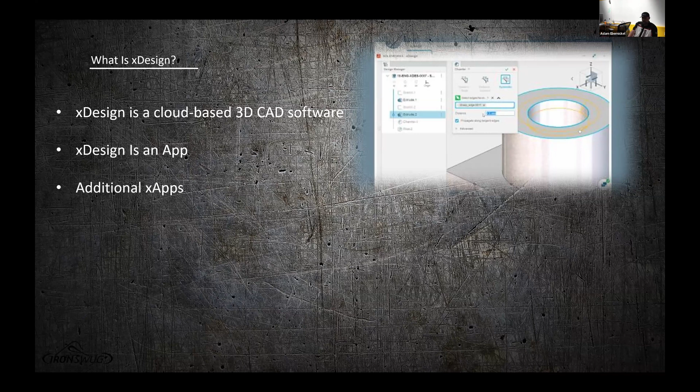Just thought I'd throw them out there so you know: X-Shape, which is subdivision modeling, X-Mold for mold tools and stuff, X-Frame for weldment and structures, then X-Sheet Metal for sheet metal parts and flat patterns and different things like that. So there's a lot of different X apps out there you can look at and utilize that are all web-based.

One thing a lot of new companies like about the platform is because everything is cloud-based, you don't have to worry about spending $2,000, $3,000, $4,000 on a PC or computer for somebody. You can get them just a basic notebook and run everything from that and let the cloud do all the heavy lifting, right? So it reduces some IT stuff there too, as well. Just a thought to think about.

But first, let's go ahead and talk about a few things that you guys are going to see. Hopefully everybody participates, if not that's fine too. But let's go ahead and talk about a few things that you're going to see in the app on your phone here in a minute.

On the right-hand side, when you start looking at it, you're going to see this little menu. This is important because when you're using a mobile device or touchscreen device, this is going to be shown. Now, if you're on a computer, you can actually go down and click it and tell it to come on, in case you have a touchscreen computer or something.

Let's start with the first one: your shortcut menu. Everybody knows what the S key is, hopefully? The S key is a very powerful tool. If you hit the S key while you're designing, it'll bring out a shortcut menu.

I always like to say reduce your mouse miles, right? Don't sit there and spend lots of time chasing for commands and features. Put them at your mouse. It's going to save so much time. You're not running miles and miles a day with your mouse. You're able to locate them right there where you're at and where you need them. And the S key does that for you.

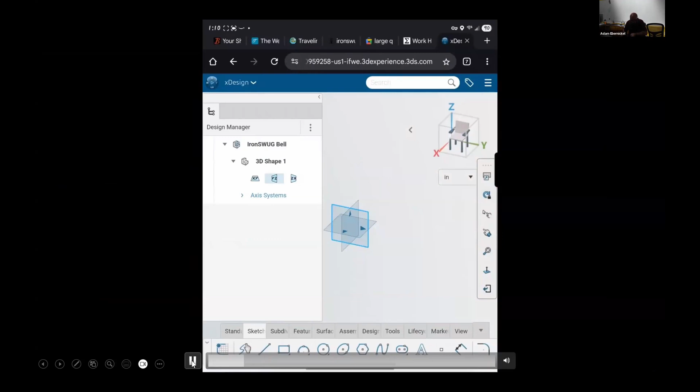Okay, so this is our interface. Back up, right here. All right, so this is our interface. Back up just a little bit more. Yeah, this is our interface.

So this right here, guys, on the right-hand side, these are those touch controls I was telling you about. You can find them down here in your menu at the bottom. Consider this kind of like your command manager for SolidWorks. It's where all your functionality is going to be. But this is those touch controls that pop up when you have them set on, or if it understands you're on a mobile device, it'll automatically pop those up for you.

The first thing we're going to do is throw in a sketch. We'll play that for just a second. We're going to click this plane right here, this primary first plane, the YZ plane. We're going to start drawing a sketch.

Now, there's a couple ways to do a sketch. What I like that's kind of cool is this little feature down here, and this is what I try first. If this doesn't work for you, you don't want to try that, that's fine, we can do it a different way. But this is kind of like a freehand draw.

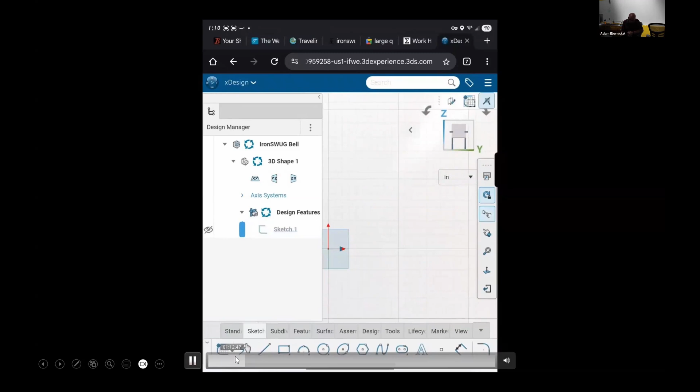So back up just one second, I want to re-show that freehand draw portion. So when I get ready, I click it, and you'll notice I click down here with my finger. I shift this over a little bit right before I do that. And I click it, watch how this freehand works. See how I just drew it up? Man, that's horrible, I'm surprised it even made that straight line. But when I freehand drew that, all I did was a straight line up, and I kind of arced it over a little bit, and it gave me a line with an arc.

And so that's the first one we want to make in our first sketch. The next one we're going to do is square this off. Now watch how I did it this time. I did it, it was not much worse than the other one. Look how bad that made that line. So sometimes it's good, sometimes it's not.

Pause for 1 second, please, Brad. They also have another application or app on the platform too, it's called the whiteboard. And the whiteboard's cool because you can just go in there and throw notes, similar to a whiteboard you see in Teams or whatever you're using. But what's cool about the whiteboard on the platform, when we did a presentation, was it 2 years ago at the Dassault Systèmes headquarters?

When we did that presentation, we did one on a whiteboard. Brad and I were doing a combined presentation, and I went in and drew this fairing. We were doing a motorcycle modeling mayhem thing. I sketched it out by hand, and when I made an oval for the speaker cutout, it was a horrible oval, but it still understood it as an oval and stuck it in there. So it's pretty cool to conceptualize things on that whiteboard.

But here I go and I click, and when I tap here, it automatically understands that needs to go there, I think. There's one place it doesn't. It clicks there. I kind of drag it up and pull it down so I can auto-align it. Notice it's pulling in and saying, hey, this is going to be a horizontal relationship here, very similar to what SolidWorks does with its assumed relationships. But I didn't quite assume that very well. Look at that line, it's a little off kilter. That's fine, I just go in and add that vertical relationship next.

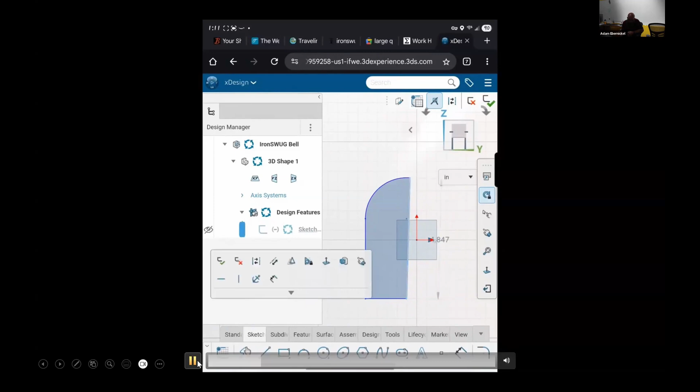Okay, let's see how everybody's doing. My connection was lost. But okay, looking.

And if that drawing thing I was talking about didn't pan out just right for you, that's fine. You could easily come in here and hit this line command. That's what I went back and did, a line command from here to here. Then if you do the arc command, just like in SolidWorks, when you take the end of the line back to the point and come back out, it'll automatically create that arc for you. That's a SolidWorks feature, still the same here. Then you draw it out and get your arc there, and we square this off.

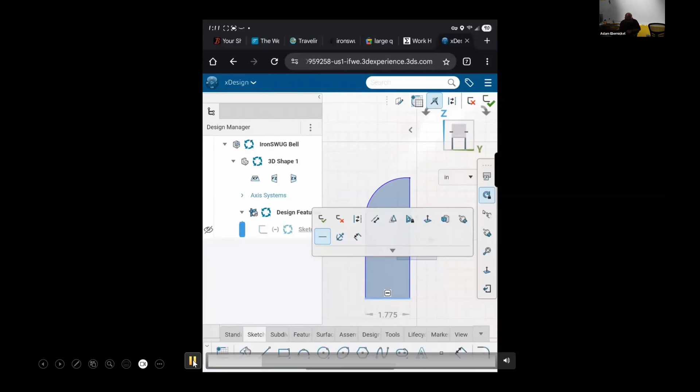Go ahead, notice I went back in here and added the horizontal relationship that was there, but I had to go back and add the vertical there too. I'm gonna check it, I'm doing... now hold on, pause right quick.

So here I have selected the multi-selection button, which is this button right here. What I want to do now is make sure that I am fully defined. I want my sketch to be fully defined, so I need to tie it to the origin somehow. My rule of thumb, and you'll see this in other presentations throughout the week, is that making your part or design symmetrical about the planes makes for a much better design practice overall, whether for mating, changing different features, all that stuff. So I'm doing a multi-select: I select this line, and I select the origin. When I select the origin, then I'm going to mate those.

Let's go ahead and play that. So there, click it, well that's coming in a second. I dimension that - that's going to be 1.25 on that primary line that we first drew.

You can pause real quick - you can do one of two things. You can go down here in your command manager or where your features are, and forgive me for not knowing all the names in XDesign just yet since it's fairly new, but this is going to be 1.25. You can click the line, very similar to what's been done in SolidWorks 24, where you just click that line and the dimension pops up for you, and you click the dimension. So it's dimension preview - thank you, Brad. That's the same in XDesign, they're doing it there. There's also a little dimension function in your tools as well that you can use. So that's going to be 1.25 here, and we're going to do a radius of 1.

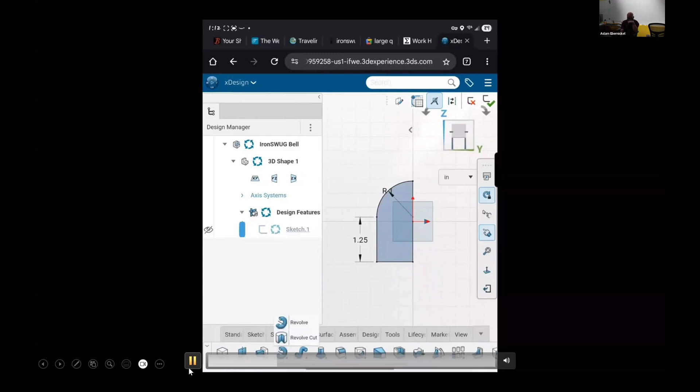So I select revolve, and now pause for one second. This is the only thing that can be a little cumbersome, and I'm noticing that especially with your guys' phones. I'm not going to lie, I may have cheated just a little bit - my phone unfolds and gets a little bit bigger. So I've got a little more real estate on my phone than you guys probably do. Either way, I cheated a little.

This box will pop up, and it can get a little cumbersome in your way. You can move that box out of the way, and if you drag it all the way over here, you can actually dock it as well.

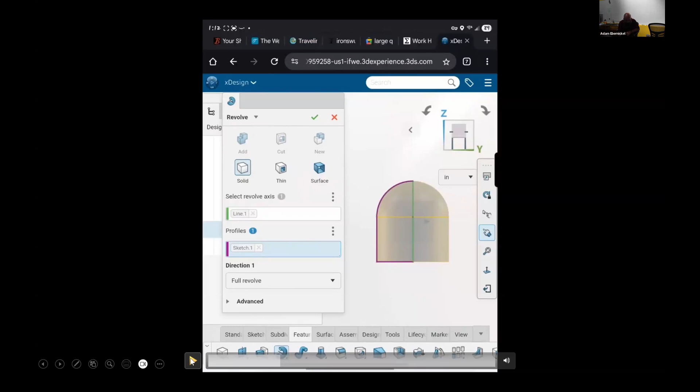Okay? Yeah. All right, so we picked that, we rotated it around. Did the revolve.

All right, so the next thing we're gonna do is we're gonna shell it. So in order to shell it, now go ahead and pause that real quick. This is not playing nice today, is it? Nope, it is not. So while he's getting us back to that point in the slide, I'm going to shell.

Now you can do a revolve and do a thin wall, which kind of works to where we're getting ready to go. The only problem with the thin wall, unless anybody knows different, you can't remove the face. So it's basically going to leave just a hollow entity at this point, versus what we're doing, we want to remove the bottom face. So back when we did that revolve, we did it at

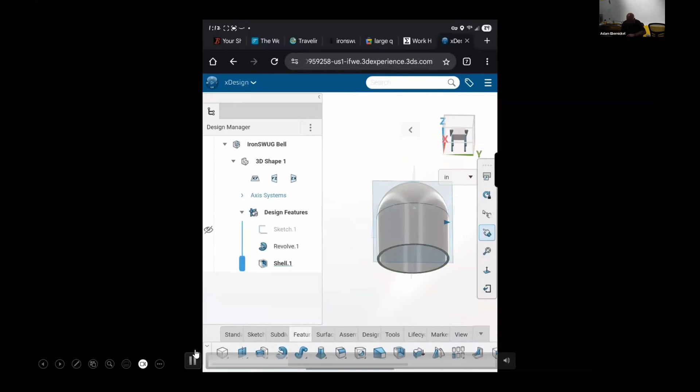0.0625, so we did a 16th inch thick wall when we did the shell, and we removed the bottom. Once we remove the bottom, we're going to go ahead and click it. Now there's a button up here - when you click this button, you can hit ISO and get to that. We click the front face, and now what we're going to do is just add a couple of sketches, and this is to try and get us to the next point in the features.

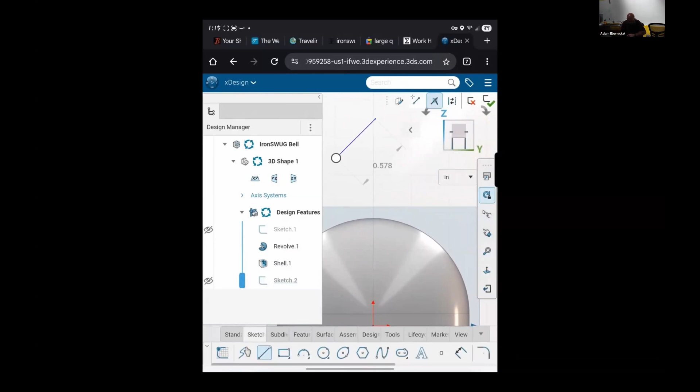We're going to add a segmented line, and there's a reason for that here in a minute. It's basically to help us. I mean, we could have added a point on the line too, but doing a segmented line, we can actually use it to help locate this line on the arc of the model.

The top part of that segment is going to be 3/4, the bottom part of that segment is going to be 1/4 of an inch. Now notice this is where I didn't connect - I thought I connected them and I didn't. So what I do is I just drug it down out of the way, did a multi-select, selected the 2 points, and then connected those.

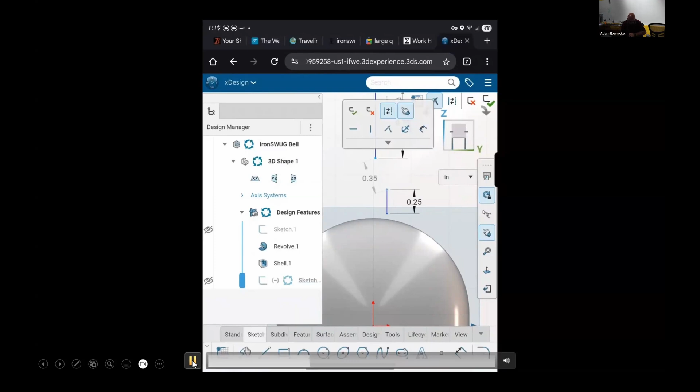You can go for just a little bit. All right, go ahead and pause just for a minute, give everybody just a minute. Anybody have any other questions up to this point?

I don't know how to find it. Got something pulled up here, huh? Go back.

I don't know what that is. Is that from the browser or your phone? No, from the browser. Is that an X button at the top? What is that button? I can't see it, the trash. Trying to zoom in, zoom out. Go back maybe, done, try back. Stop, it's not doing anything, is it? It was there in the background.

Drag and drop your content anywhere. Oh, I think you went into notifications. So you're there, okay, let's close that. We can try and restore it. Nothing, and if you didn't save it, it's not going to come up. Did you save this part of it though? Not this advanced part, but just the section, yes. I can start it again, okay.

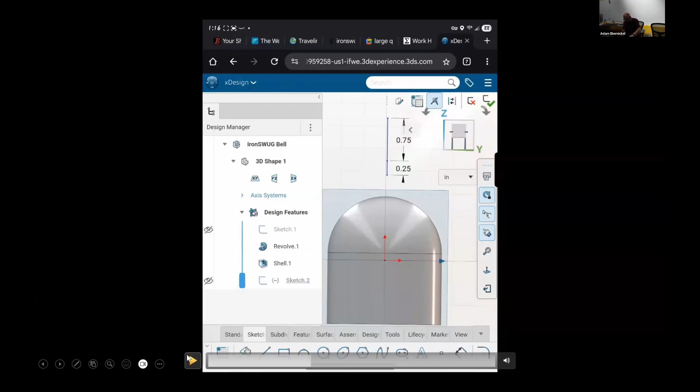All right, let's go ahead and play. So now we're going to take this line and slide it down into the model just a little bit. We're going to pick some points. I want to take that line and make sure it's aligned with that plane in the middle. So I align that, and then take the next point from the segment and attach it to the arc. That way I have that 1/4 inch sticking through, and the 3/4 sticking up. Okay, pause, it's fine.

All right, so the next thing we're going to do is add a plane. Go ahead and pause. What I've done is add that plane from down at the bottom - in your features, you gotta go to your features to get to it. Then add your plane here. When you hit add, just grab your main horizontal plane because we want it parallel to that. And this one's going to be kind of important.

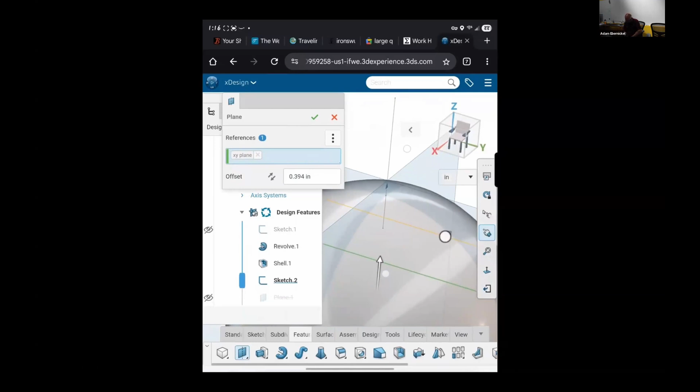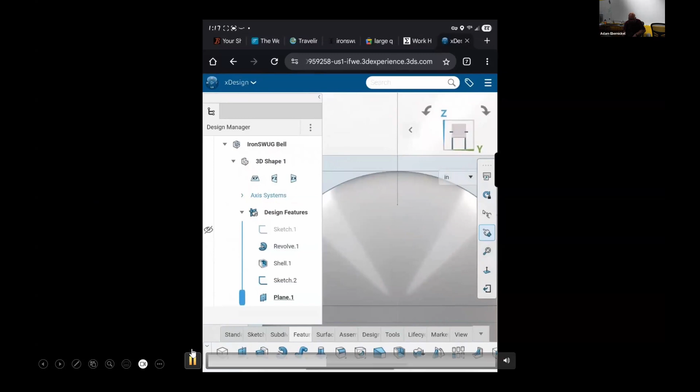We want to use the cursor button this time. Going back to what we were talking about a minute ago, when you're using your fingers, if you're like me with big fat fingers, you'll be clicking everything but what you want. But using that cursor, we can fine tune and pick this point right there. Using that cursor feature is what's going to help us. See, that's me not using the cursor feature - I picked the whole dome of the thing, and I was like, okay, let's try that again. Let's do the cursor. Once I did that, got the cursor in there and select it, now you see my plane sitting right at the top of that dome.

All right, next thing we're going to do is throw some sketches in there for those planes. Here's where I'm saving - come back here, hit that save button. That way it saves all your stuff, so you don't lose it if you get backed out or something.

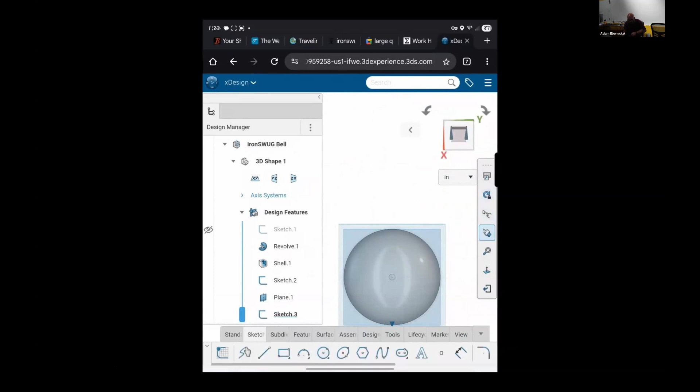We're going to select that plane and draw a circle on that plane. Just do a center circle or however you want to do it. Click it. That circle is going to be, I think, 1/4 inch - no, sorry, 1/8 inch, we're going to do an 1/8 inch on that circle. Again, here we're just creating some different sketches for some sweeps later on.

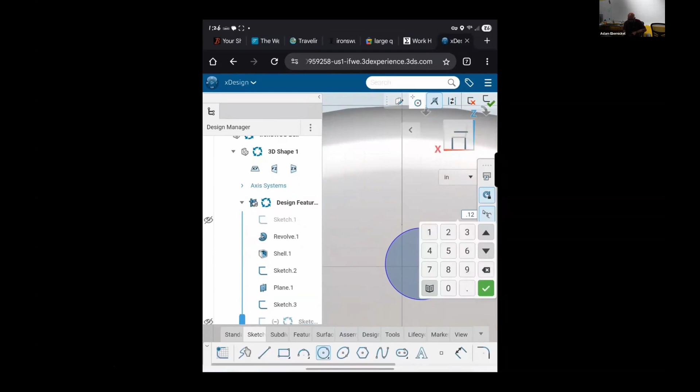All right, select that right plane. We're going to throw another circle on it. When we're coming in here, we're going to select it and put it right here on this. You can see, I think this is the one I missed too, using my fat finger or whatever - it kind of came off, that's fine. We're going to make the diameter of that one 1/8 inch as well.

Now here's where you have to go in and make sure that you don't do what we were just talking about, right? That extra circle came from me not turning that function off. So if you don't trigger or toggle the function on and off, you'll end up putting a bunch of different circles or lines or whatever on.

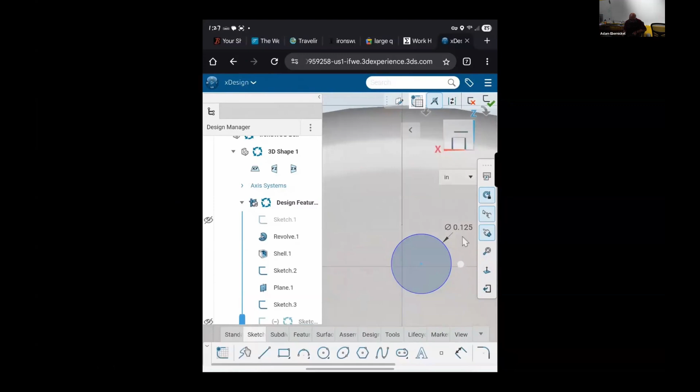Then we're going to multi-select the point here, use that cursor to select that point, and then we'll connect those so we get it online.

That was another 1/8 inch circle. Again, that little box, you click that and it comes out, that puts you isometric.

We've got one more circle to do. That's going to be on the front plane. And this one's going to be a little bit bigger.

Go 1/2 inch on that circle. It's going to slide over kind of in that same general area on another point again. There's that line. I use this line as a reference, right? And so I put it in here and go to the top of the quadrant.

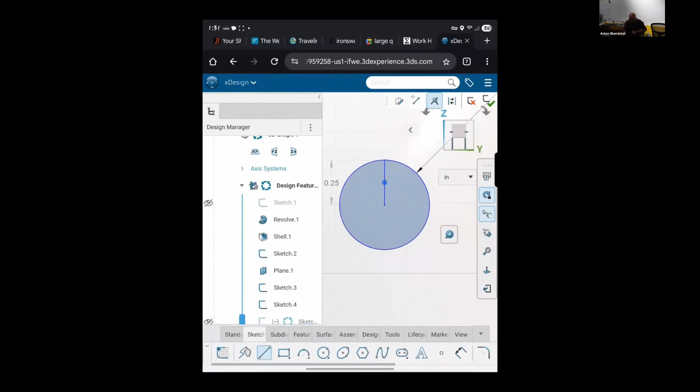I come over, I have to deselect everything again, right? There, me not deselecting and putting another line in there. Once I deselect, I can select it, change it to a construction line. Still have the same flyout menu functionality like we have in SolidWorks.

Now I can select that, do my multi-point select here in just a second because I'm not doing it here. I didn't do a multi-point select, so it didn't take. So, oh, duh, got to go hit multi-point select, right? Even myself. Got it. Click that point, and that point's going to go over there and connect to the last point on that 2-segment line we created.

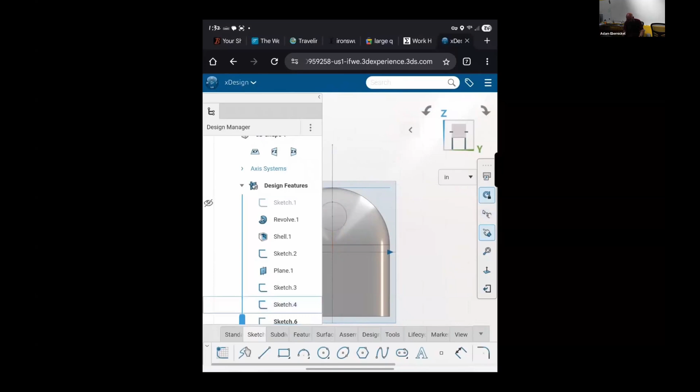So at the bottom of that 2-segment line, we connect the top of the circle to it. Okay?

So there, we got 3 circles we basically did a sketch on, one on the top on that plane we created, one on the right plane, that's an 1/8 inch, and then one on the front plane that is a 1/2 inch. And now we're going to go in and do some sweeps.

Just going to kind of sweep through this stuff and create them. We're going to start with this main line here and click it. So we're going to say that's our path. And the circle down below is going to be our profile, not the dome.

Again, my fat finger, click the dome. Telling you, the cursor is the way to go for me. Of course, that sweeps it.

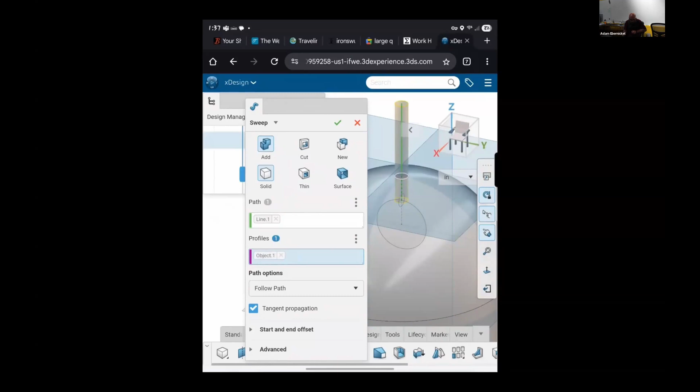That gives us our line there. We're going to do the same for the other ones as well. Make sure we have them combining when we do it, or merging.

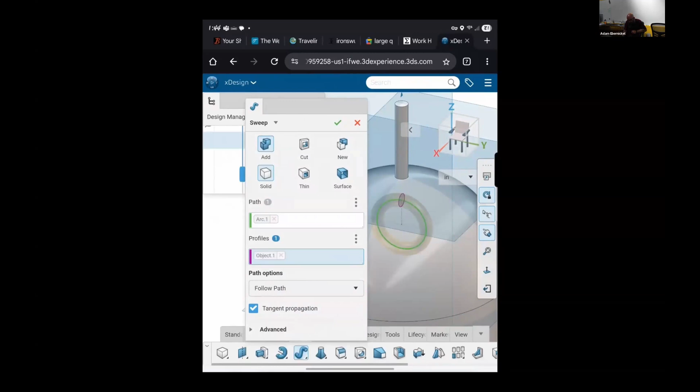All right. There we go. And I'm going to create another one. I think I've got them all now. That's it. So we've got the 3 sweeps.

You're going to pause right there for a minute, Brad. We got the sweep that we did here with that profile and path. Then we have the interior. Play a little bit more. It might turn upside down. So yeah, right there. Pause.

And then so you see how that came down, and then this one was created here. So that's from those 2 circles and paths that we made. Okay. And the reason we have to rotate this up is because we're going to start doing some stuff on the inside here.

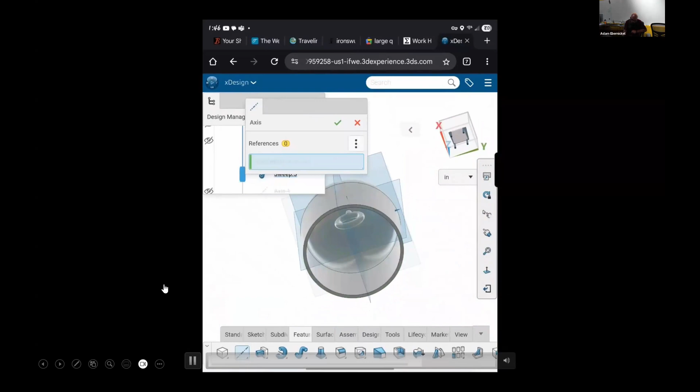We're going to do an axis. And we're going to pick the interior donut per se, right? Because we want the center of that donut for the axis, or axes. And that's because what we're going to do next,

I'm trying not to reveal exactly what this is. Some people might know, even when we tell you, you may not know. So I'm going to pick that plane.

And what I'm doing here, pause for just a second, Brad. All right, so what I'm doing here is I pick this plane. After I've got the axes, of course, I put the axes in on the donut. I'm going to pick this plane, then I'm going to pick the axes.

And the reason I'm doing that is because I'm saying I want this kind of plane, and maybe parallel, right? But I want to take this plane and I want to move it up and have another one just like it on this axis that I created. But I want it to be 20 degrees. So I'm setting that plane at 20 degrees.

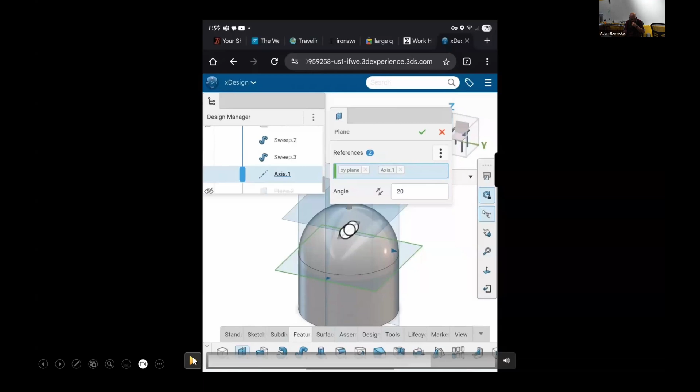Next thing I'm going to do is go in and offset that plane just a little bit, because that put it at the center of my axes. And this is all going to make sense here in just a minute. But that put it at the center of my axes.

I really want it to drop down from the center of the axes a little bit, and I probably could have just done an offset with that. But I just created a new plane. And I dropped it down, I think, yeah, 3/16 of an inch, 0.1875.

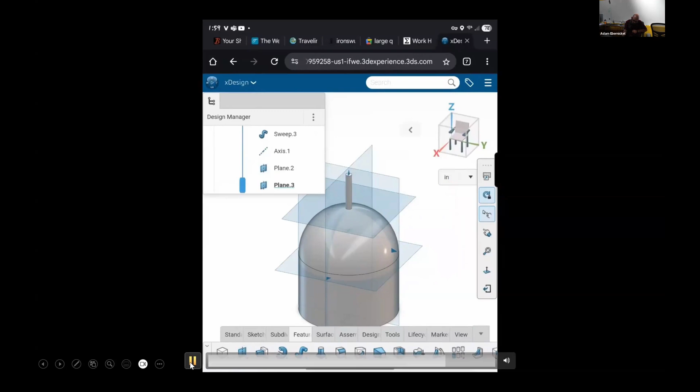And once we drop that down, you can toggle it back and forth. Notice I'm toggling back and forth just to see, because it's such a small dimension, just making sure it's going the right direction for me. And once I toggle that down, we're good.

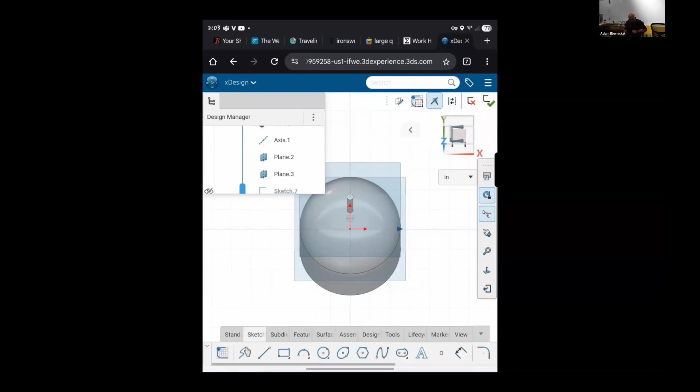I'm going to go to that plane next, because I'm going to put a sketch relationship on there. The next feature I want to create is a circular pattern, and I need something to revolve that around. So I'm going to use another sketch line on that plane, the last plane we created. In the bottom of your feature tree, pick that plane and do a sketch, and we're going to draw a line kind of diagonally across that little plane.

Now this one, I know somebody's going to fuss at me, because I did not fully define this line. Boo. I know Toby Schnaars is going to be out there hating on me, saying fully defined every time. If you haven't heard that song, go listen to it, it's a good earworm - fully defined every time. But I just went ahead and got out of it. I could have defined it real quick, but it's really arbitrary. It doesn't matter too much as long as you have it going diagonally across that plane.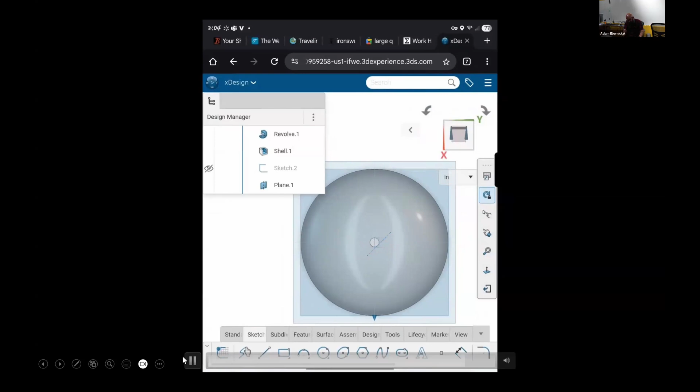Now we're looking for our features, and the features we want in the pattern are going to be the loop, basically those sweeps we created - that's what we want to do the circular pattern on. We'll pick that sketch, the last sketch we created on that new plane. We only want 2 of them. Let's go ahead and pick that, change the angle and the number of instances to 180 degrees and 2 instances.

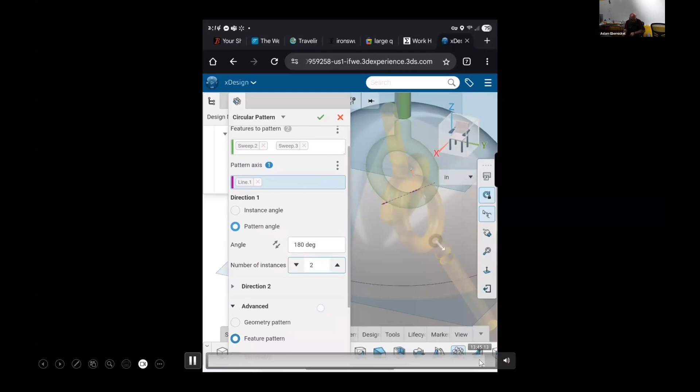You gotta kick it and wake it up because it's still showing 3. Scrolling down - actually, can you back that up just one second? Okay, so watch when I scroll down here, because you've got to make sure you have this stuff selected right or it won't work.

Not geometry pattern - it actually has to be a feature pattern, not a geometry pattern. Anybody know the difference between feature and geometry patterns? You want to pause that real quick, Brad? Okay.

Feature and geometry patterns - anybody use patterns in SolidWorks? Yeah, for me, occasional things like that. Okay, yeah, or I'll use the geometry pattern when the feature pattern doesn't work. Yeah, or vice versa, right? And this one, the geometry pattern doesn't work, right? So I use the feature pattern. Great reason, right? It doesn't work, we'll just use the other one.

I like that idea. Okay, so let's start with feature patterns. The feature pattern basically says, okay, I've got all this data that created that feature, and now I want to apply that to all these other pieces that I just patterned out there. So it's having to calculate for every one of those instances - it needs this level of detail for each one of these. The geometry pattern says, oh, you did this over here, do you really need that same data across the board, or can I just give you a pretty picture that's going to be right? That's basically what the geometry pattern is - it's just giving you a graphical representation rather than all the full-blown dimensions.

Now, the difference is, if you're using SolidWorks - and XDesign is probably the same way - if you're doing something that has a gazillion patterns, maybe some kind of mesh where you've got to do a lot of cutouts, and you're patterning that stuff out, use geometry pattern all day. If you use a feature pattern, it's going to take probably - we've seen 10x before, Brad, when we've tested it. Or honestly, it usually just crashes - it just freezes for a while.

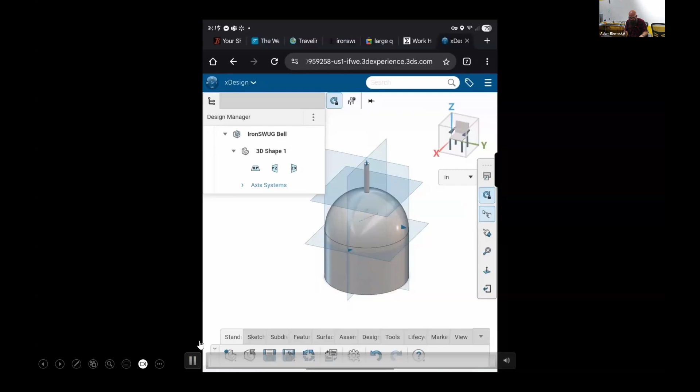Saving the component. But if it's not a purely symmetrical component and you're creating an array, sometimes it doesn't work.

I feel like I've had times where the geometry pattern doesn't work. Yeah, there are some instances where SolidWorks is basically telling you, hey, I've got to have that data to recreate this. It's like projecting onto a different body or surface. Exactly. By all means, if I can select geometry pattern and it works, that's where I'm going to go on my patterns. But yeah, you're right, there are instances where SolidWorks is like, I can't just do it on geometry alone, I'm going to have to have all that data too.

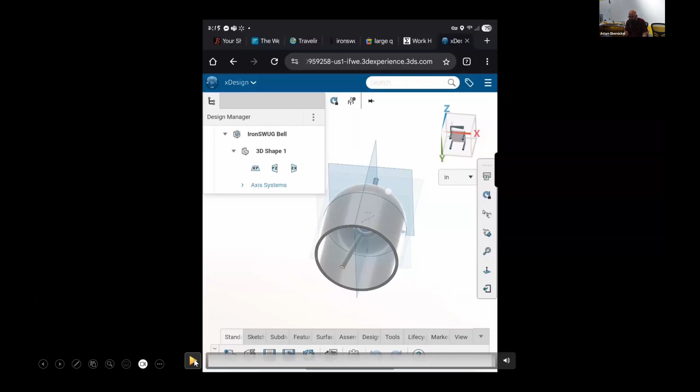All right, so I think we have reached the end, just kind of shifting it around, giving you a final look at it. I know that's a lot to take in. It was more about getting your hands in there and using that software and just seeing what it looks like. It can be a little cumbersome on your mobile phone. I just kind of wanted to see how it would work. I know it was a lot.

It was drinking from a fire hose, right? I know, I know it was. But it gave you a little insight, just a little fun game to kind of kick the week off. Let me jump back in here and I'll finish out the presentation and we can turn this over to Mr. Hank Meador. Yep.

All right, so I always like to wrap my presentations up with two things: a little note card of if I was you, what would I write down for my notes, and then my call to action that I usually like to put out there too. So for the first note, I'm going to say design anytime, anywhere. That's what I would write down, that I could design anytime, anywhere.

There's lots of hardware out there that's needed to use traditional methods. With this, there's not, so it works very well. It's got cloud-based, cloud-powered flexibility, kind of fun to use with the touch. Gives you a new tool to play around with and learn and not let defeat you, right? Because it is easy to use, but it does take a little practice. And design while lounging, to be lounging somewhere and design.

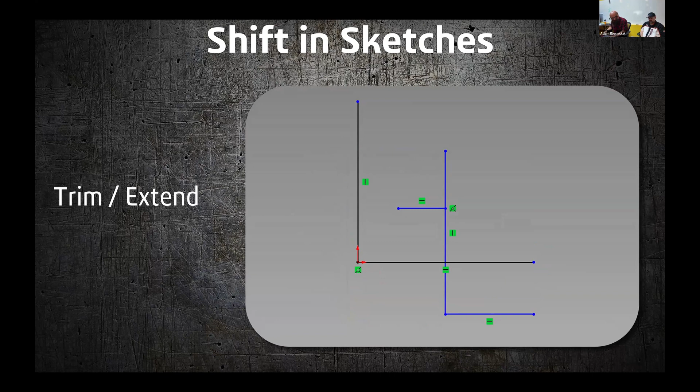So we'll jump over to SOLIDWORKS here to show you, because everybody is always tired of PowerPoint. We'll go into a sketch here, we'll start a new part. Go into a sketch, and we're going to show you everything the Shift button can do just in the trim command.

Draw some sketches, draw some lines in here. Some other tips and tricks while you're in here: the Enter command will also repeat your last command. Notice how I'm drawing a line and it's keeping everything connected here. What if I don't want that? Well, if I click and hold the left mouse button, it'll let you go, and it'll keep you from having to keep that chain together.

Just a little extra tips and tricks in here. I want to go find my trim command, hit the S key. I have mine customizable. We have the typical trim command. We can come back, power trim. We can pick trim the closest, that kind of thing. But we're going to cut some things off here. What if I want to extend this one out just a tad? Well, I don't want to exit my trim command. Hold the Shift key, grab the end of your line, and pull straight up. It allows you to extend where you want without having to exit the command and go back in and modify your sketch.

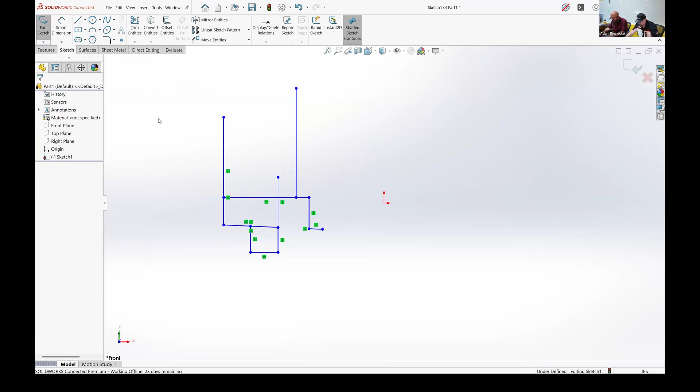Okay, we'll go back into SolidWorks. Delete all these here, use our mouse gestures here. While we're in here, how many people use mouse gestures? Okay, sometimes I'm going to encourage you to try, use it a little bit more. Start simple, because you can do 2, 4, I think 2, 3, 4, 6, 2, 3, 4, 8, and 12. Start simple, do 2 and go from there and add more to it. We'll throw some dimensions in here.

Hold the shift key over top of the center line. Go to your dimension. It automatically assumes you're going to do something in revolve mode, and it's going to tell the dimension that this is going across the center line. So now you're modeling with your design intent to say, I'm going to revolve around this thing.

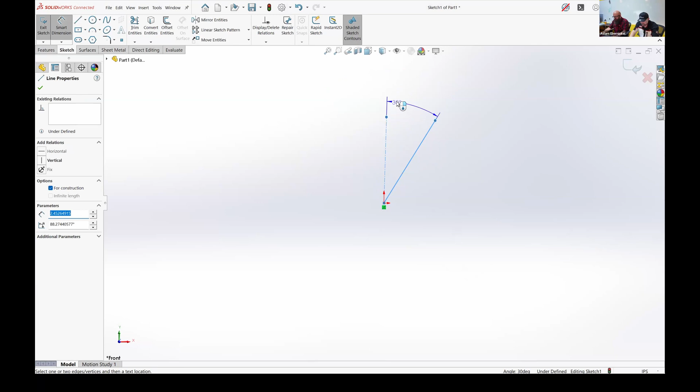I can keep going, but if I don't, we'll just cancel that out. We'll do it again to show how quick that was. Go to our dimension, select our dimension here. We know I've already set it at 60, so we can set it at 30, or if I hit the shift button, it's going to tell it I want a full width dimension, not just a half across the center line. So we're just trying to add and play around, learn things as we go.

Another big one we use a lot is dimensioning some slots, arcs, that kind of thing. We're going to create a slot feature here, or just a sketch.

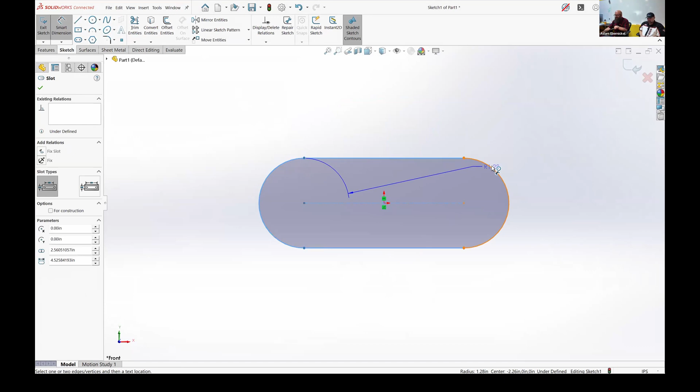Throw a dimension in. What happens when I click the other one? It's going to automatically assume I want center to center, correct? Well, maybe that's not my design intent. Maybe my design intent is I want it edge to edge. To do that, normally it's center to center. Find the dimension you want, go to your leaders here, click the max to max, get the same dimension end to end, correct? You can do it faster.

We'll delete that back out. My timer's going. There we go. Hold the shift key, click your outside radius, hold the shift key again, click your outside radius. Instead of going in and finding 4, 5, 6 clicks to get what you need, you hold your shift key, click the 2 dimensions. Now you've got your intended design, your design intent on this slot. So I know now my machine's going to cut this thing at 709, or well, I don't like that, so we're going to come in here and say 7.

I fell in love with that shift feature when I learned it. Yes, it's mind-blowing. Just holding one key down can change the way a certain command will behave. Things you didn't assume, and you're used to click, click, click, click, click, and spending all this time moving your mouse around. One button can help you out.

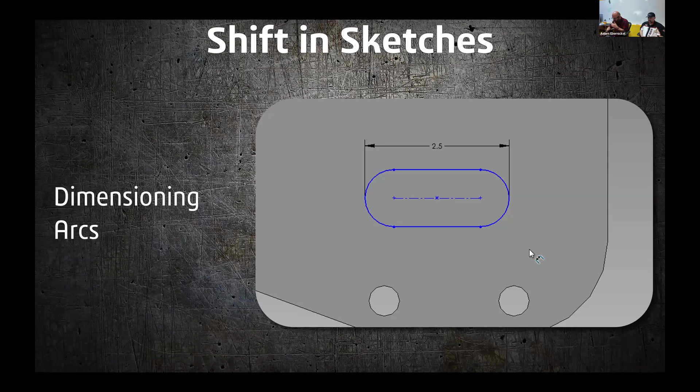So now that we've got our sketches created, we're going to go to our parts here, and we're going to the feature tree. Now, I'm sure everybody knows that if you click a top item and a bottom item and hold shift inside of Windows, it'll select everything in between those. That functions the same pretty well in SolidWorks.

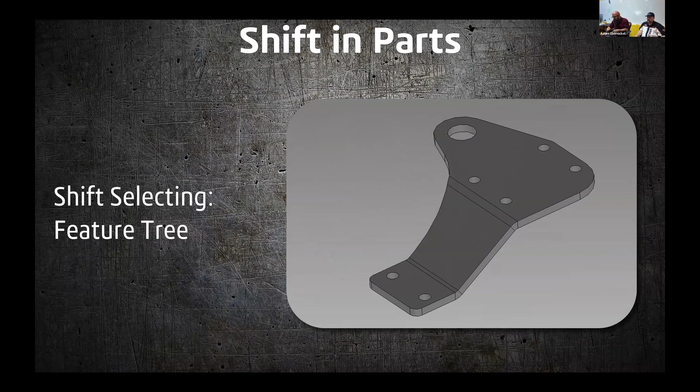But it also does things with your arrows. So I'm rotating things around, trying to show something to a customer. I don't want to touch the mouse because it's a little too jerky or too sensitive, or he's got some things he wants to look at specifically. Well, hold the shift key left or right, and it's going to rotate 90 degrees rather than the predetermined spin box increment set in your company default. Currently, I think mine is set at 15 degrees, but I don't want that. Hold the shift key, I can rotate it around 90 either way.

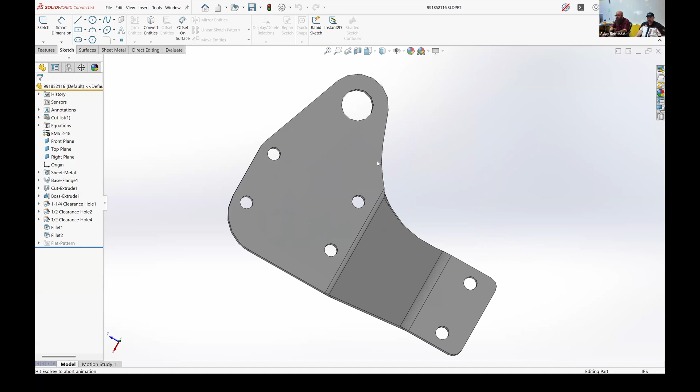The shift and the arrow keys. So whatever arrow key you press, it'll go 90 degrees that direction. That's one of the things that when we started navigating around parts, this looks good and all, but I'm trying to find an exact angle I want. I can play around with it, add what I need, create some views. If you're looking at creating specific views, you can do that as well, use it as a view command. It's a good question.

All right, so, zoom in and out. Z, zoom out. Shift Z, zoom in.

I'm not a big fan of using keyboard for commands. As far as moving parts around, I use my space mouse, which I didn't have plugged in, or it's dead. There it goes, to do the command. But if I don't have one and I want to navigate parts around inside my feature tree without using the mouse, or if I'm working on some things: Z zoom out, Shift Z zoom in.

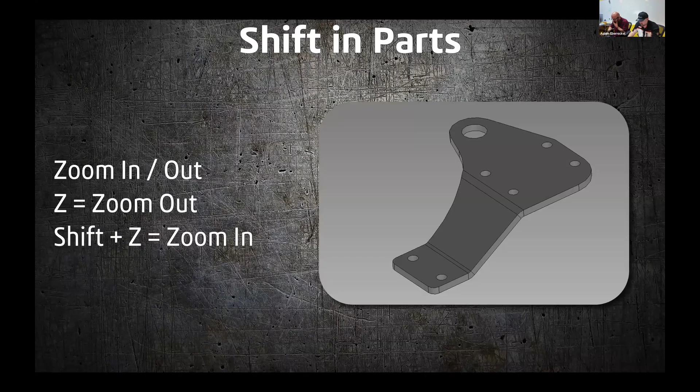Also, same thing, zoom in and out on your mouse wheel. Shift, zoom in and out, it's faster. So if you're working on little bitty parts and you want to get into a really tight nook and cranny, hit the shift key. The zoom increments increase. I think it's called quick zoom or fast zoom. Or if you're working on things that are really large and you want to zoom into a part to work on, instead of sitting here and spinning the wheel hundreds of times, use the shift.

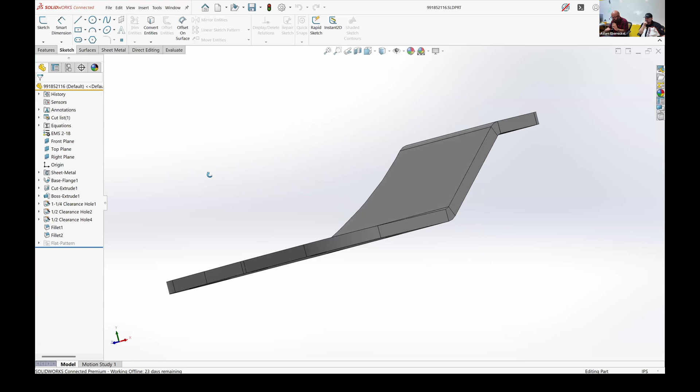Also, middle mouse button, or actually push and hold the wheel on your mouse, depending on if you've got a 3-button mouse like this one here, the 3Dconnexion one's got a center button on it. Hold it down, it's your pan rotate. Or hold Shift and move up and down, that does zoom in and out as well. So if you're trying different commands, trying different things, finding ways to make your workflow a little better, Shift and middle mouse button up and down will help you zoom in and out.

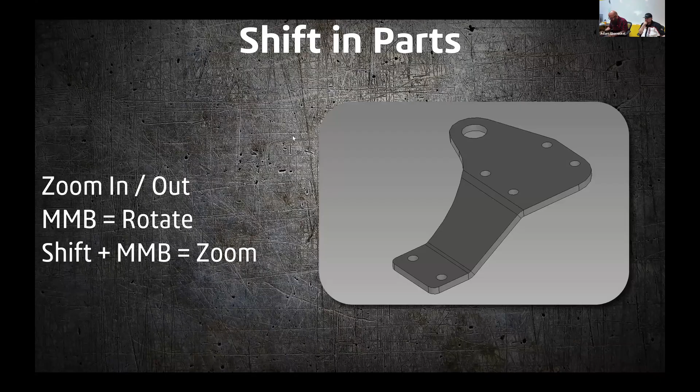My apologies, I went backwards. But PowerPoint ain't doing too good today. I know, PowerPoint ain't doing too well.

So let's see if I have that part. If not, we can make one real quick. We'll throw a pattern in here and create one real fast. Shift also will help you ignore instances or add instances to pattern components, linear patterns, things like that. We're going to create a part here real fast, throw a sketch in there, or throw a pattern in, and we'll go from there.

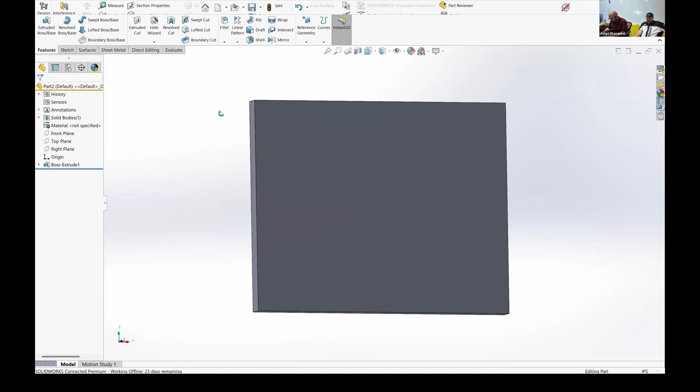Yeah, I fully defined mine, Adam, so I don't want Kirby getting... I don't want Toby getting mad at me here. Throw some dimensions in just because I don't want to be that guy. Show bad habits.

You were talking about having a mesh pattern over and over again. This will be some actual tip that you could use. You would like.

See that? Let's hide that. Poke the eyeball, blind it, hide all the problems you don't want to see. Unpoke the eyeball and see all your sketches.

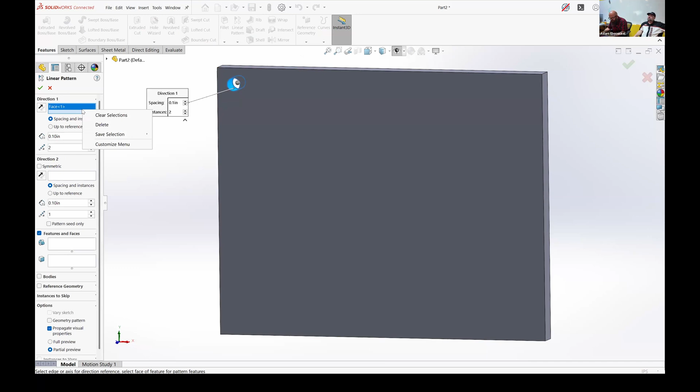All right, so inside of our linear pattern here, we're going to select our directions we want to go. Feature to pattern.

Let's add some numbers in here. Oh, got my pattern in here. Well, I don't think I'm going to actually pass something through here. I want to make sure I can edit your feature.

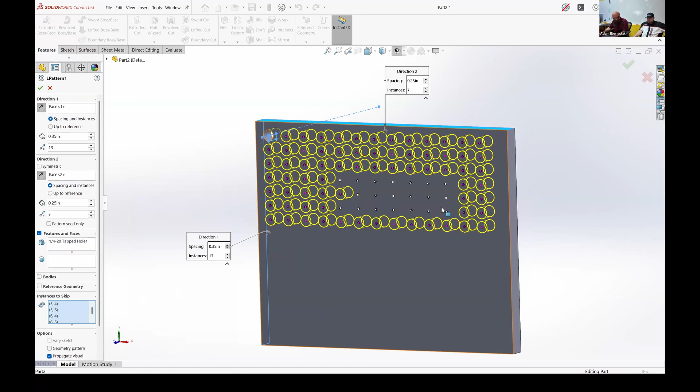I can do instances to skip, click the things I want, or I can come in here and select the things I don't want, and then hold shift, and it'll ignore the things that I don't want already selected, and only pick the things that I want. But if I backwards select over it without holding the shift key, it'll bring it back. It'll toggle it on and off. You hold shift, it'll only tell it to make it go away.

Didn't know that, that's a good one. Yeah, I didn't know that either.

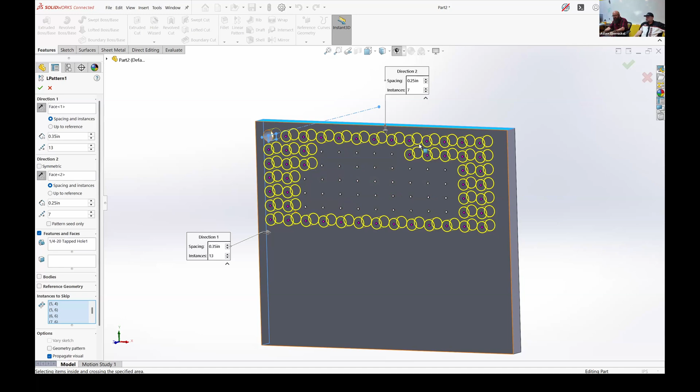So now I've kind of got the space I want. I've still got my pattern there. I've ignored the things that I don't want. We can use that as just another little button, so you're not having to sit there and click and hide everything one at a time.

Too legit to quit, right? Keep going. It's not like we're making a macro. No, this is all built into the software. It's good.

So, got our sketches, got our parts. Now let's go to our assembly.

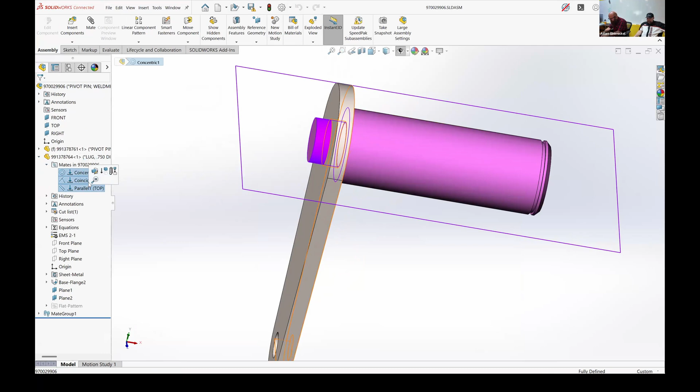All right, let's unmute. Let's unmate this thing. All right.

You can also do transparent faces on things. Let's see if it'll do it for me inside the mates if I have this set up correctly. I believe it is correct. Let's just save this here and bring it into the newest version.

Before I get too far, how many people are using SOLIDWORKS 2025, the current one? Oh wow, nice, 24? Oh awesome. Anybody using Connected, SOLIDWORKS Connected? Okay.

All right. Well, I'm in here, I'm going to create some mates. I click the face that I want, it makes it transparent, so I can see how my mates are going to go.

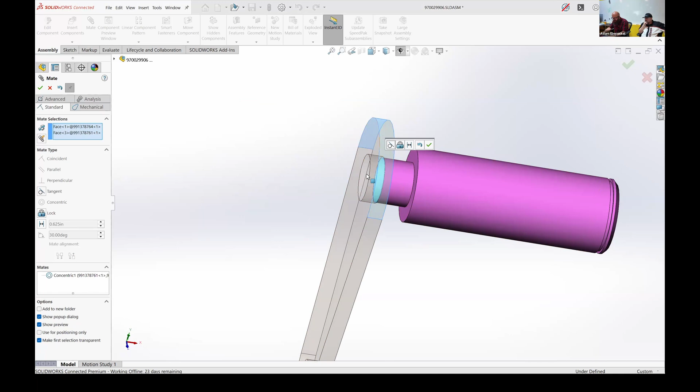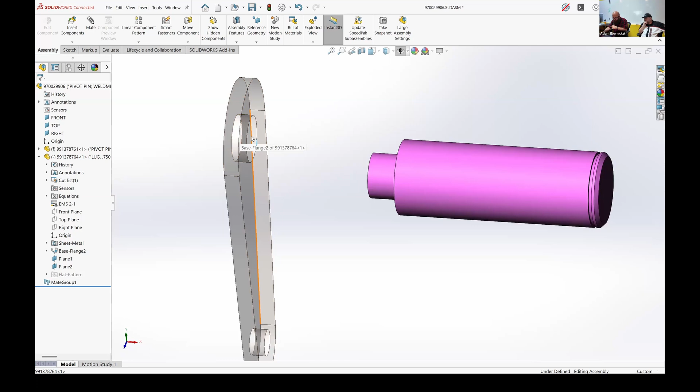The shift button will allow us to pick the areas inside. Actually, back up, Control Z. We're going to make this part transparent first because I'm a dum-dum and forgot that, just so I can work and see where I'm going. But I don't necessarily want these faces in here. But notice it's allowing me to do it. I click shift, and it's going to allow me to actually select the face I want, even on a transparent part.

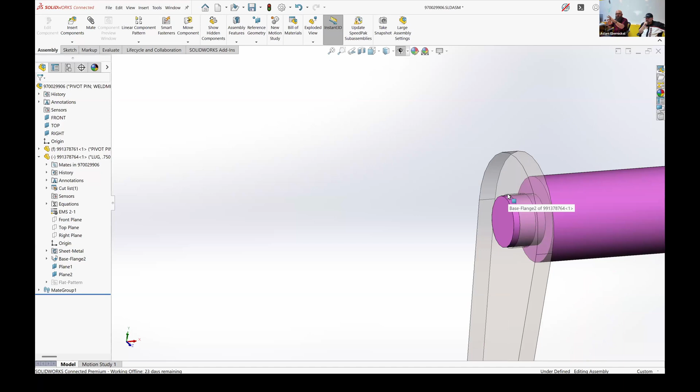If you have something in the way while working in transparent areas, hold Shift and click to actually pick those faces around inside those areas. Normally SOLIDWORKS assumes you don't want to select inside transparent faces and ignores them, but with the Shift key it lets you grab those transparent ones. Just a quick tidbit if you're working on something big and complicated and want to look into it while still using those faces as selectable features.

Does everybody know if you hold the Tab key, you can hide something, and hold Shift Tab to bring it back? When you hover over something with Tab held, it'll hide it. Then hold Shift Tab and hover over where it belongs, and you'll find it again. Shift Tab will bring those hidden things back.

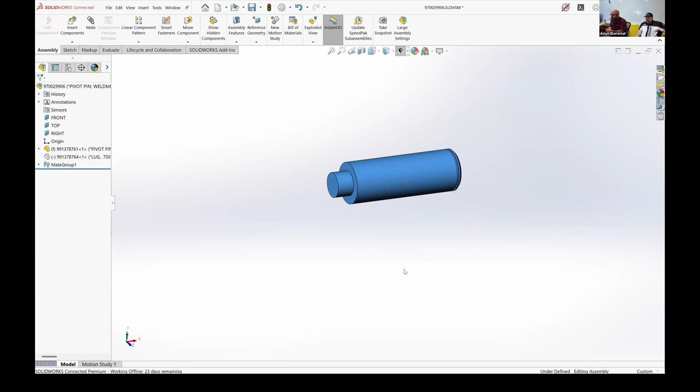Another tip: if you hit Control Shift Tab, using all three fingers, it'll temporarily highlight what's hidden so you can select the specific thing you want to show back.

So if you're working on big assemblies and you've hidden a bunch of things while digging into something, and you want to show one specific hidden item, Control Shift Tab brings it up in a bluish color and lets you select the individual part to show again, rather than showing everything. A lot of users hide what they want or isolate what they want, or vice versa. This also works really well combined with isolate.

I wouldn't know 100% if it's blue - he's colorblind. I'm red-green color deficient, so some of those things don't show up correctly for us, but yes.

I want to warn everybody about Control Shift Tab: if you're in a super large model and try it with isolate or something similar, it's probably going to crash your computer, or at least make you wait forever while it loads all that transparency state information. If you're working with large assemblies over 1,000 parts, be very mindful. Just giving you little tidbits to make yourself a bit better.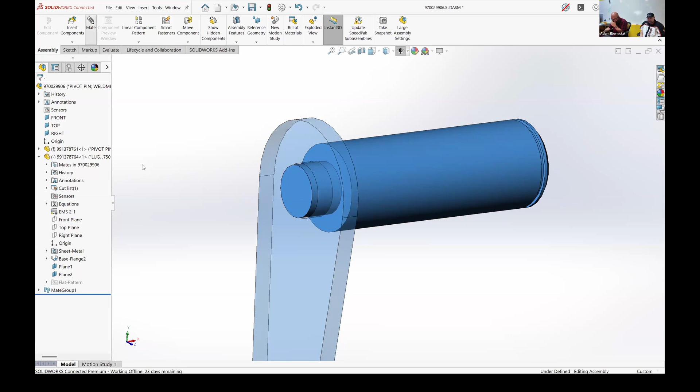If you want to hide certain faces while mating parts, go in here and use Shift Tab - you can actually hide those mates or hide those faces.

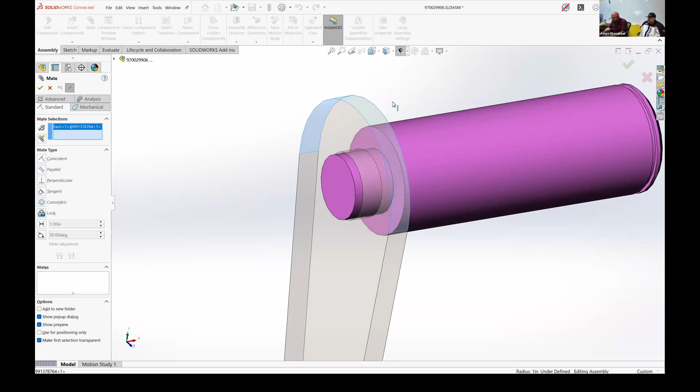Alt Shift, that's it - no wait, Alt. It's transparent so it might be hard to see, that's probably what's going on. Now it's going to make a liar out of me - Shift Alt for back, Alt flip it away. I know, but it's just not doing it for me right now. SOLIDWORKS Connected is not playing nice. I think I broke it - Murphy's Law, we'll blame Adam on it. Got a big show. Well, we'll see what I can do. I'll just keep going so we don't go over too much time here.

Copying and pasting appearances: Control C, Control V will copy parts. Control Shift C will copy an appearance inside SOLIDWORKS and let you paste it to another part. So if you're designing something with a weird purple, blue, or carbon fiber look, you can copy and paste those appearances between faces using Control Shift C and Control Shift V, which copies just the appearance and not the individual parts themselves.

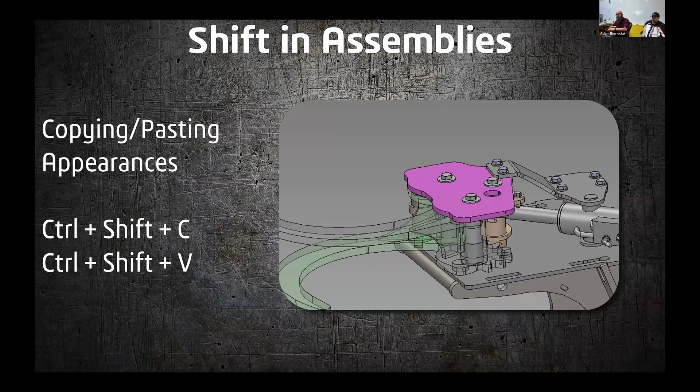All right, drawings - this is where I use Shift all the time.

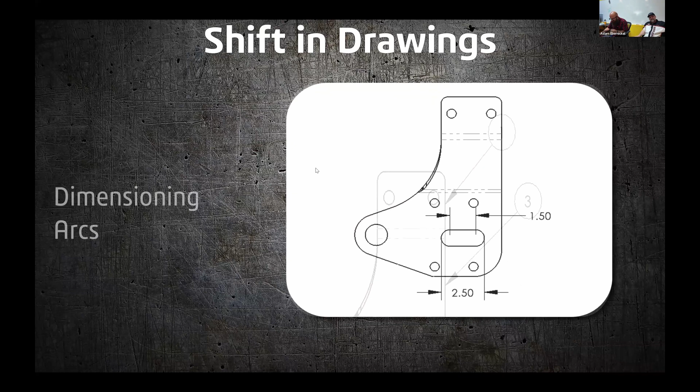SOLIDWORKS just... what did you do? I'm going to make a bad dad joke and say SOLIDWORKS just shifted the bed. Attention to the SOLIDWORKS behind the curtain. All right, let me exit out of this and restart SOLIDWORKS. Murphy's Law, everything goes wrong when I'm in the middle of a presentation.

So we don't go over on time since we're getting kind of long-winded, let's showcase some things here. I've already shown you the dimensions for sketches. Those same Shift key dimensions will allow you to do outside-to-outside radiuses, inside-to-inside radiuses on regular drawing dimensions. Shift also allows you to stack these two balloons together.

Hold the Shift key and drag it around, and it'll allow you to stack and unstack balloons as you need. It also allows you to reorganize the balloons in order. So if you have a set of stacked balloons and want to put them in a specific order—bolt first, washer next—your Shift key allows you to reorganize those balloons one at a time as you put them together.

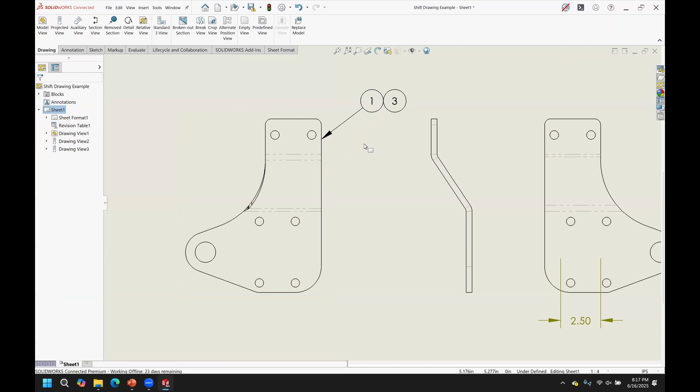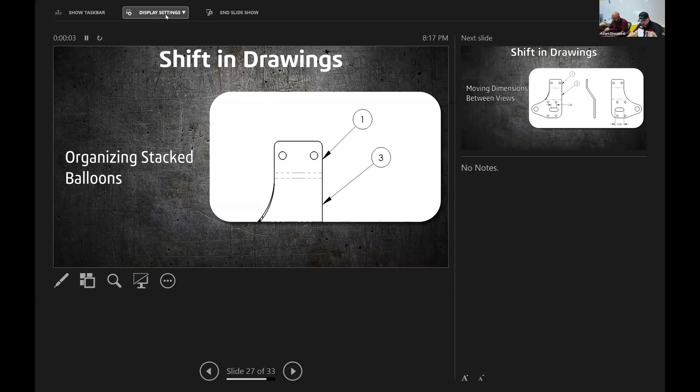Now, go back in here. They got SOLIDWORKS back up. This allows you to organize stacked balloons, and it also allows you to move dimensions around between views.

I'm going to build a dimension with a set of geometric tolerances, or actual tolerances inside. So we'll just do 0.5 here, build it up. We know we can copy and paste dimensions around, but I can actually grab, Shift, and drag it over here to this view and move it.

Tell me you didn't do that. I've never seen that—you just hold the Shift key and drag the dimension from one view to another. I've never seen that before. That's pretty dope. You can Shift and drag. I'll do it again, Shift and drag to the other view. That might be where the next little flaw is.

Again, things I didn't know you could do with the Shift key—because this drawing view is getting a little cluttered, I want to move it over to another one. Hold the Shift key down, grab and drag it, and move it around like that.

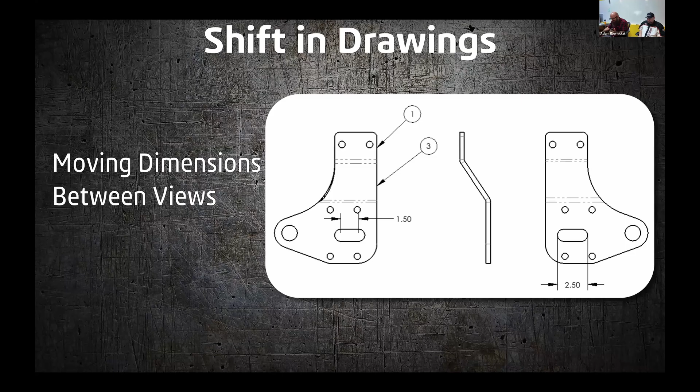It's amazing when you start really digging into things. This is why I love SWUG and SWUG presentations—for things like this, these little nuggets you learn when you thought you knew everything, and it's like, oh, you can do that too. You don't even need everything; there's just always one or two little things.

I've got a user who loves to type in all lowercase. I come from a background where you don't do that—that's blasphemy. Now, I haven't done this on this laptop because it's got an FN lock, so hold on. Shift, FN lock, there we go. Then we use Shift F3, which forces everything to all caps. So you can select all your dimensions or notes that some user just doesn't like hitting caps lock for, and Shift F3 on that.

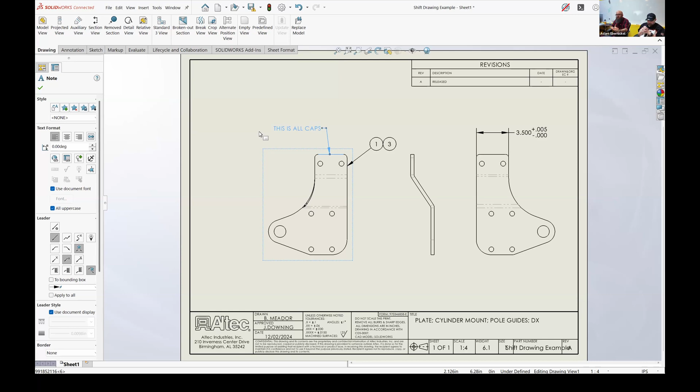Does that basically just check the all caps? Yes—it toggles this all-uppercase function down here in the bottom corner, just toggles it on. We can do that again: Shift F3 turns it on and off. You can do that with tables as well, so if you're forcing revision tables or bills of material, you can force it on that way.

So again, I showed you we could already do the dimensions back and forth—mind blown. I tend to find little snippets of things inside the SOLIDWORKS help documents. Test out the Shift function, like I like to call people to try new things. Test out your Shift function and tell your coworkers about it. Everything in here, I just went into the SOLIDWORKS help documents and typed in the word 'shift'—it was 75 pages, because it tells you every little thing, including things inside FEA and routings. But it allows you to go through and find that information. So if you want to learn something specific, go into the SOLIDWORKS help document, find the version you're using, and go from there—just a little snippet here and there to try.

And with that, any extra questions?

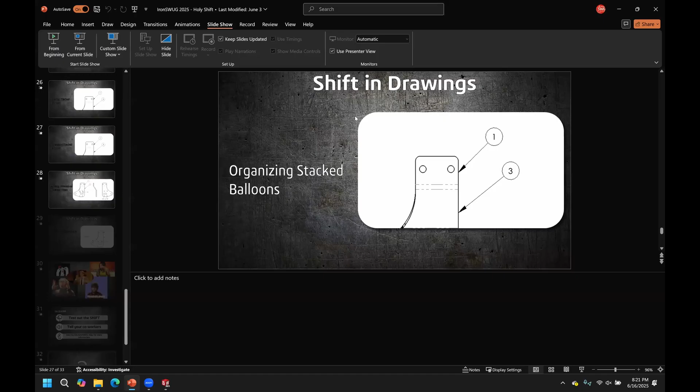Does SolidWorks allow you to measure angles? The best way I found is to click two different faces or lines, and the status bar at the bottom will tell you live, without even having to use the measure tool.

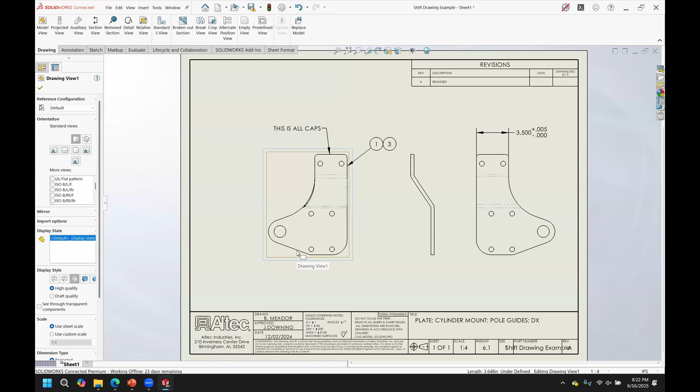If you click two planes that are parallel, it'll just give you a distance. Now if those faces or lines are not parallel, clicking those two will give you an angular dimension. So I'll show you here.

Yeah, you can do the same thing. So we have the part open up here. You click the face and the face here, and it'll tell you the dimension right down at the bottom status bar. I love the status bar - it's one of my pet peeves trying to get people to use it.

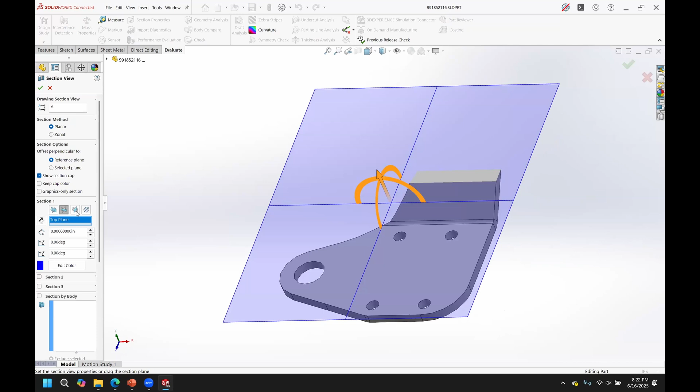There's so much stuff out there. As long as it's an edge, do a section view off this edge and bring it in. Bring it the other way though. Yeah, right there, then hit enter. Now try clicking just the edges instead of the face though.

I'm guessing it's because cross sections function a little different, even when trying to apply sketches and convert entities to them - they don't want to act right sometimes, because it's not seeing that as a face or an edge, it's just seeing it as a pass through the model. I guess in Creo this worked, I was wondering - I'm guessing Creo treats it as an actual cut of the part. I haven't dug into that software very well, but this just imaginarily slices it - I'd say it's graphics only.

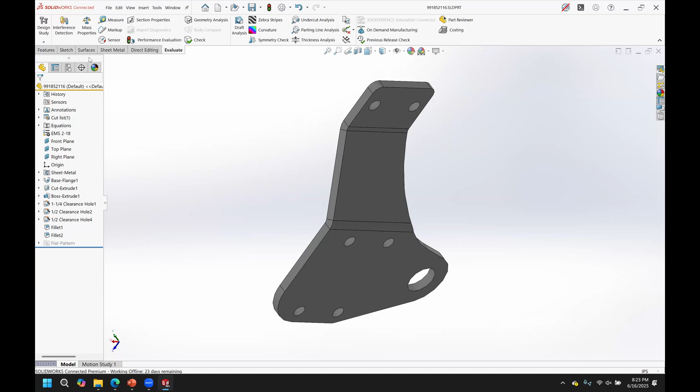Graphics only, yeah. That's a good point though, because SolidWorks does take advice from their customers and users - they do a top 10 every year where they vote on tips and ideas. So you can check out that blog and submit this as an idea, to be able to use the edges in a cross section to understand what's going on. That'd be a good enhancement to submit.